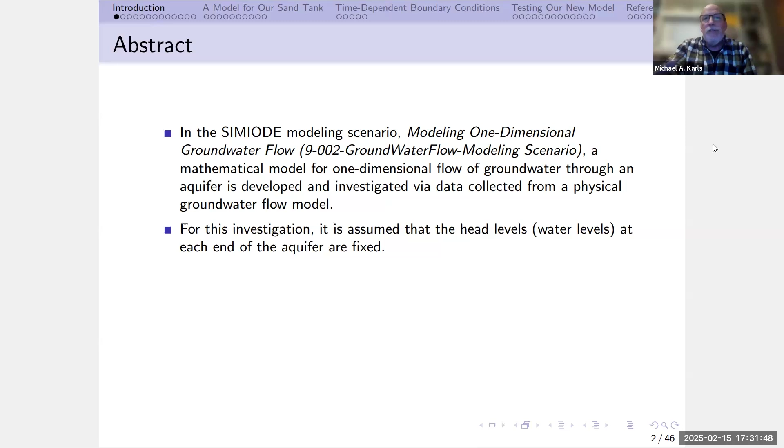In the modeling scenario, modeling one-dimensional groundwater flow, a mathematical model for one-dimensional flow of groundwater through an aquifer is developed and investigated using data collected from a physical groundwater flow model. For this investigation, it's assumed that the head levels, essentially water levels at each end of the aquifer, are fixed. Suppose instead that the head levels at one or both boundaries of the aquifer can change with time, rather than remaining fixed.

So we're going to develop a model for this new situation and use data collected from the physical groundwater flow model to investigate this new model.

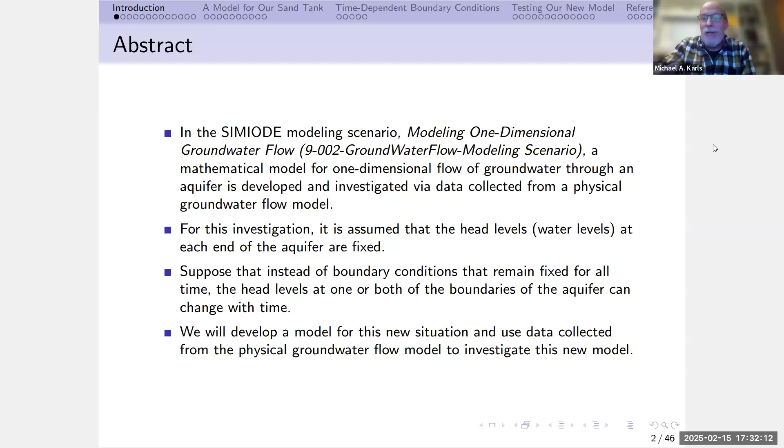Now, this talk is actually kind of complicated, so I thought it'd be good to give an outline of what you're going to be seeing here.

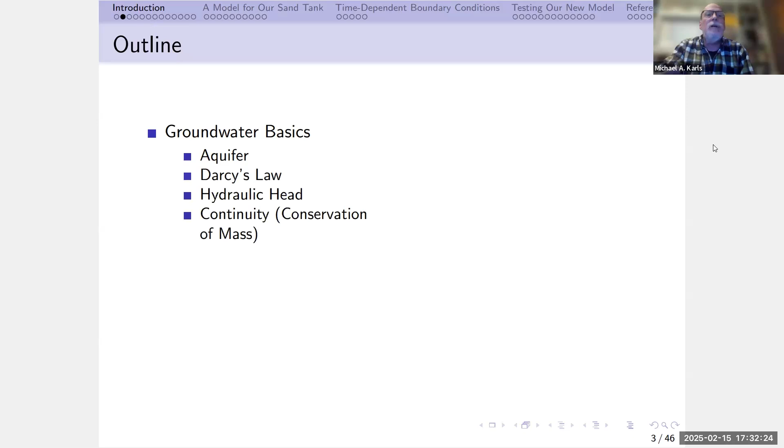First, I'm going to look at some groundwater basics like aquifer, Darcy's law, hydraulic head, the idea of continuity, which is conservation of mass, develop a groundwater flow equation, look at a physical sand tank groundwater flow model, and then talk about how to collect data from that.

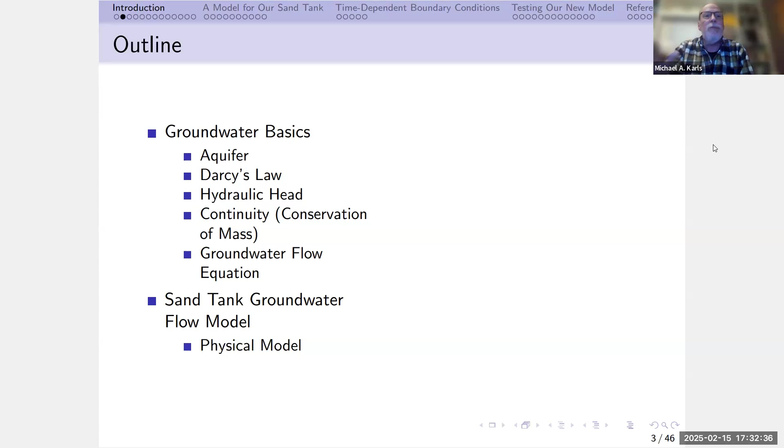And then we're going to look at the SIMIODE groundwater flow modeling scenario that actually appears right now, and we'll develop a fixed head level model and then test our fixed head level model.

And then we're going to look at a revised groundwater flow modeling scenario, and we're going to develop a time-dependent head level model and then test the time-dependent head level model.

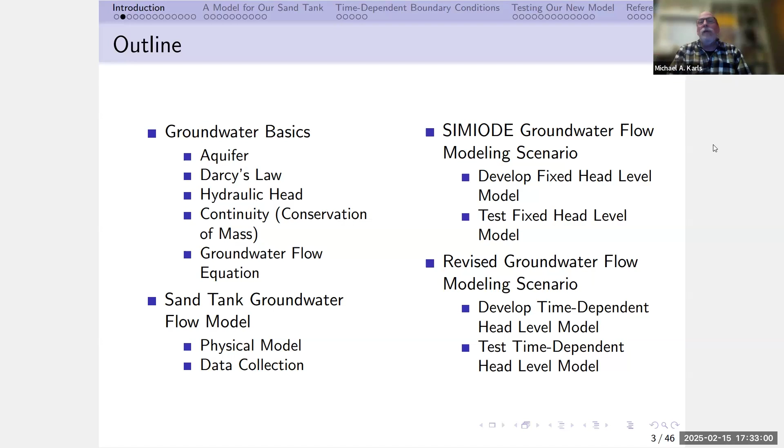Okay, so first of all, this guy is pretty famous when you're looking at modeling groundwater. This is Henry Darcy. In the mid-19th century, the city of Dijon, France, decided to improve and enlarge the city's public waterworks. Henry Darcy, the local inspector general of bridges and roads, was responsible for the civil engineering program.

One of the challenges faced by Darcy was how to design sand filters for the city's public fountains. Sand is an example of a material found in an aquifer, which is a body of saturated rock through which water flows easily. If you click on this link here, there's actually a video about Henry Darcy you can find on YouTube. This is something I show to my class when I teach this stuff.

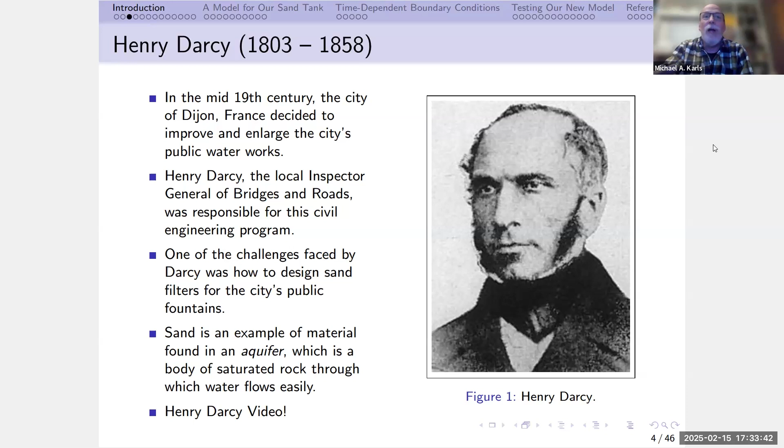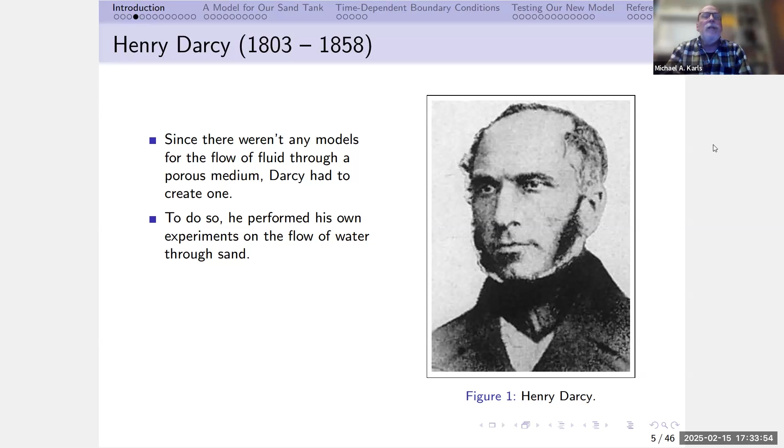Now there weren't any models for the flow of fluid through a porous medium, so Darcy had to create one. To do so, he performed his own experiments on the flow of water through sand. His results, including what we now know as Darcy's law, were published in 1856 as an appendix to a 647-page report on the project, Les Fontaines Publiques de la Ville de Dijon.

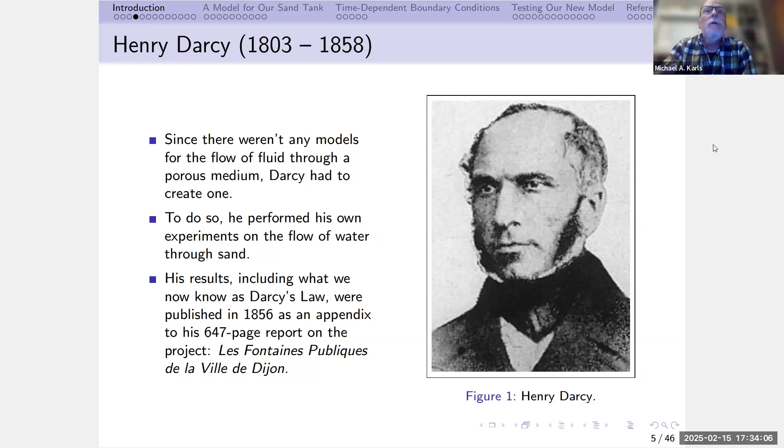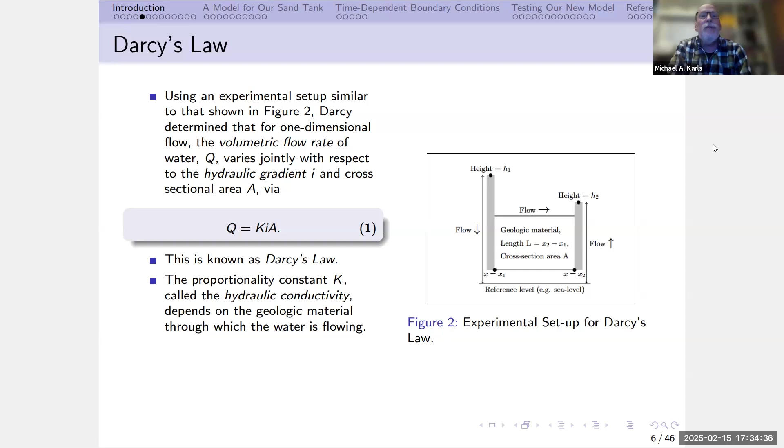This proportionality constant K is called the hydraulic conductivity, which depends on the geologic material through which the water is flowing. The hydraulic gradient measures loss in hydraulic head. Hydraulic head is loosely defined as the height of the water relative to a reference point over a given distance L.

If you look at figure 2, hydraulic gradient is the change in head level over the distance between the two points where we're measuring the water levels. If we label x1 as x and x2 as x plus delta x, and consider head drops over shorter and shorter intervals, meaning we let delta x go to 0, the hydraulic gradient can be written in differential form as negative dh/dx.

The minus sign means you're flowing from high water levels to low water levels. Now, the units of Q are volume per unit time, and the hydraulic gradient is dimensionless, so it follows that the units of hydraulic conductivity K are length over time.

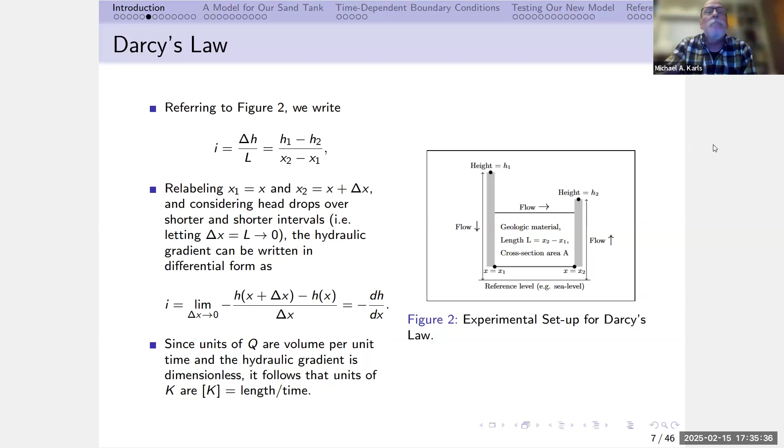Let's consider an aquifer with fixed head levels at each end, such as the one depicted in figure 3. We'll assume the aquifer is made up of homogeneous material and that groundwater flow through the aquifer is one-dimensional, meaning horizontal.

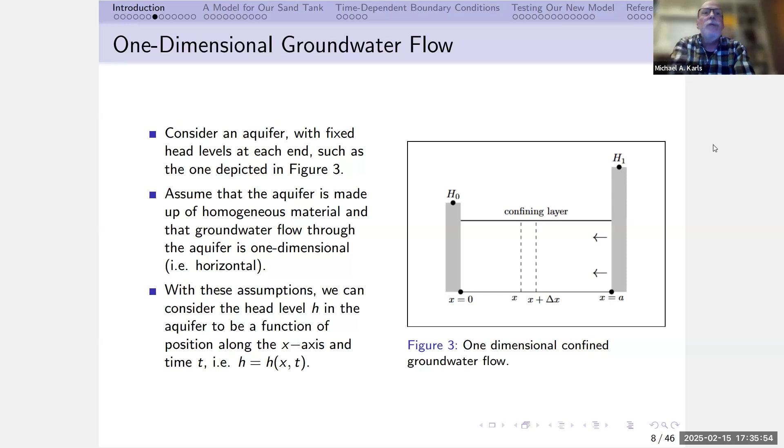With these assumptions, we can consider the head level H in the aquifer to be a function of position along the x-axis and time t. So H is a function of x and t.

This figure 3 shows water flowing from right to left through the aquifer. We're assuming the head level H1 is greater than the head level H naught, along with a small representative element of width delta X and cross-sectional area A.

If we use Darcy's law and the idea of continuity, which is another name for conservation of mass, we can derive a partial differential equation that describes hydraulic head level H of x,t at any point in the aquifer at any time.

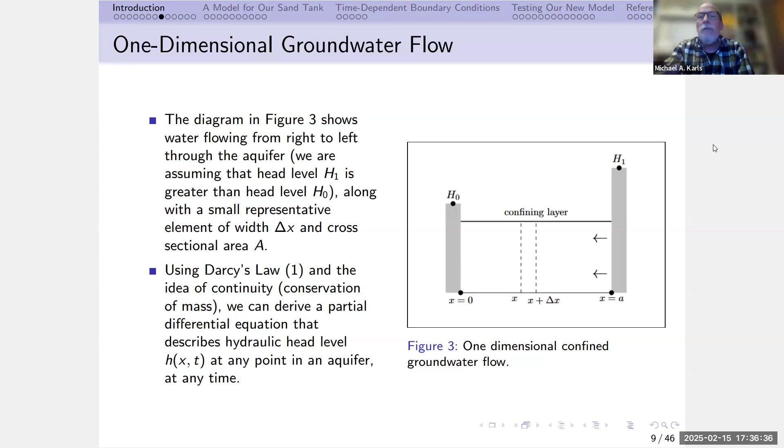There are 4 possible contributions to flow through this representative element: flow across the right face, flow across the left face, flow introduced from an external source, and flow released from or contributing to storage within the medium itself.

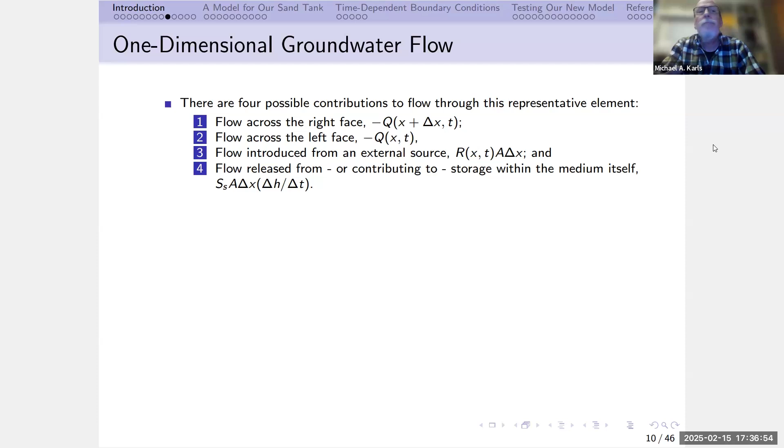As defined above, Q of x,t is the volumetric flow rate, meaning the volume of water per unit time, with units of volume over time. Typically, volumetric flow greater than 0 indicates flow in the positive x direction, so we introduce a negative sign to indicate groundwater flowing in the negative x direction.

This term R of x,t is often called recharge. In groundwater flow scenarios, it can be related to precipitation or leakage into or out of the medium from layers above or below. It describes the volume of water added per unit time per unit volume of the aquifer, with units of volume over time times volume.

This specific storage, S sub S, is the volume of water added to or released from storage per unit volume of aquifer per unit change in hydraulic head. The units of specific storage are volume over volume times length.

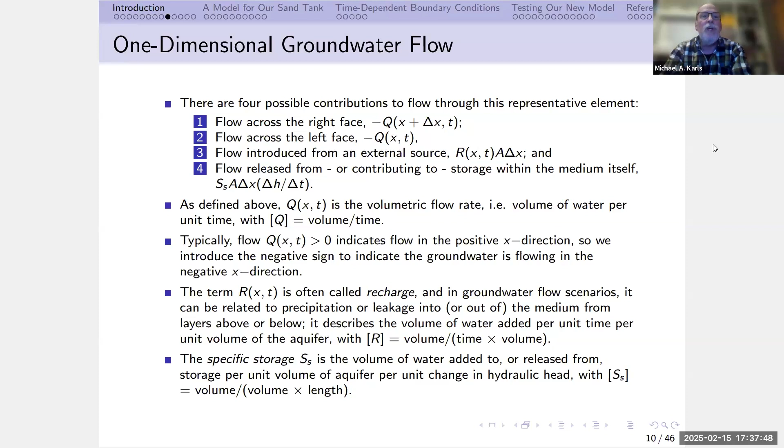If we use the law of conservation of mass, tailored to our scenario, it says that inflow must equal outflow—stuff going in equals stuff coming out. So the flow into the right face plus flow introduced from an external source must equal the flow across the left face plus any change in flow due to storage in the medium itself.

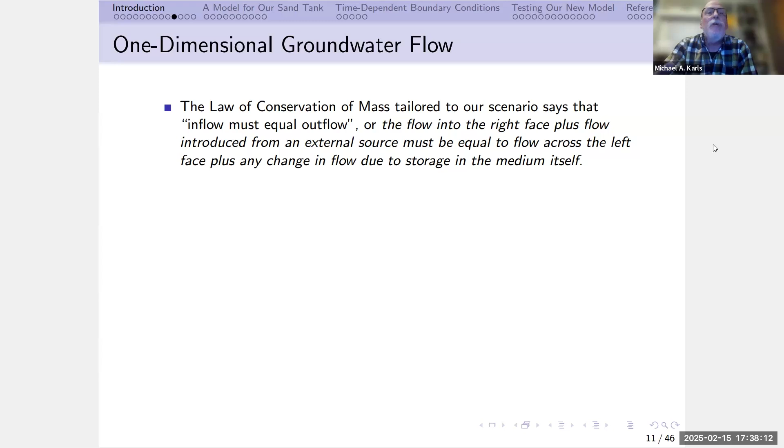Mathematically, we can write this statement as equation 2. If we rearrange to put the Q terms on the left and move the R term over to the right, we get equation 3.

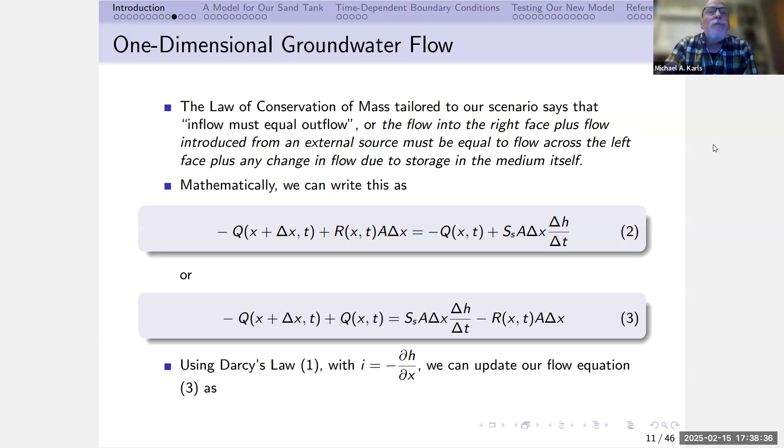If you use Darcy's law with hydraulic gradient being the rate of change of H with respect to X, with a minus sign up front, we can update our flow equation 3 as follows, giving us expression 4. Then if we divide through by K times A times delta X, we get expression 5.

Then if we let delta X and delta T go to 0 in expression 5, we get the one-dimensional groundwater flow equation 6. If you're familiar with it, this looks like the heat equation—this is essentially the heat equation, here equation 6, in the scenario of groundwater flow.

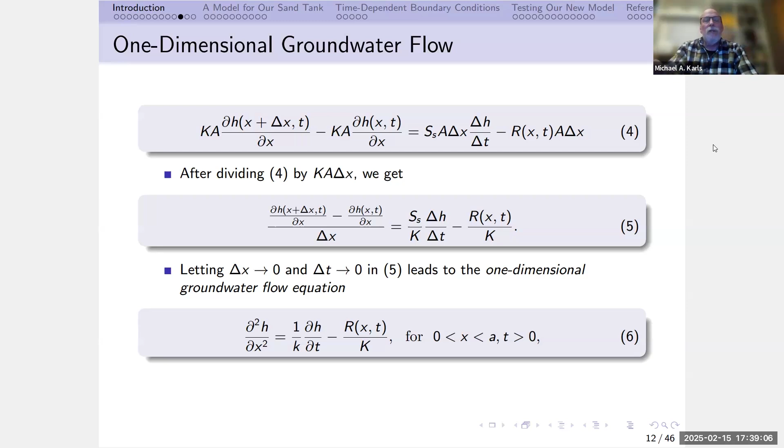Here we've introduced hydraulic diffusivity, defined to be hydraulic conductivity K over specific storage S.

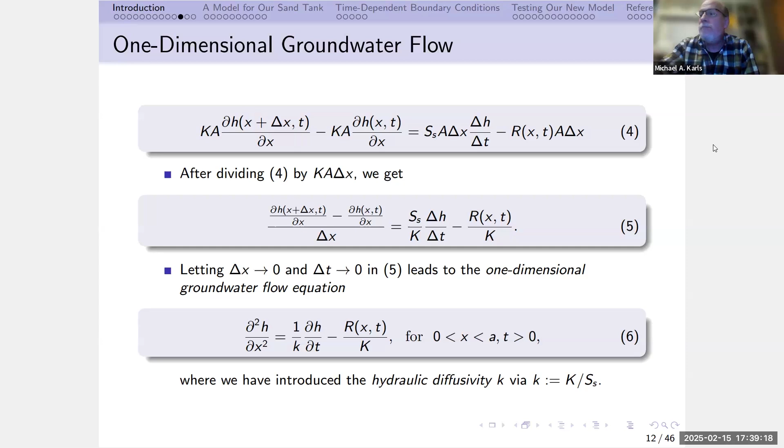One way to illustrate groundwater flow is by means of a physical groundwater flow model. We have a picture of one of these here. A groundwater flow model, or sometimes called a sand tank, such as the one pictured in figure 4, we got this from Ball State University's Department of Geological Sciences.

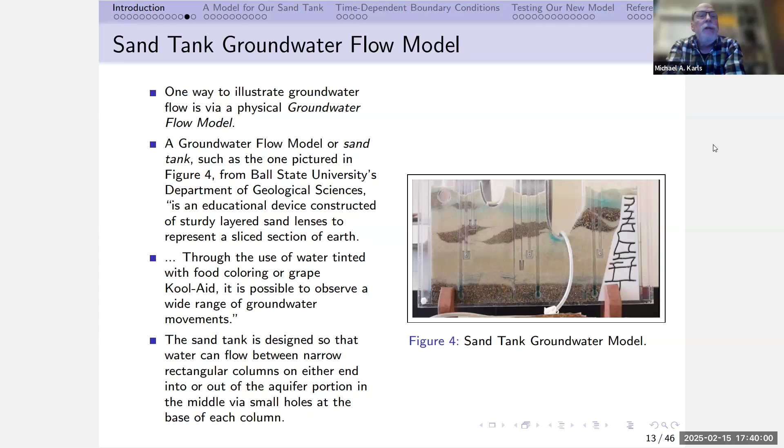These are educational devices constructed of sturdy layered sand lenses to represent a sliced section of earth. Through the use of water tinted with food coloring or grape Kool-Aid, it's possible to observe a wide range of groundwater movements. The sand tank is designed so that water can flow between narrow rectangular columns on either end into or out of the aquifer portion in the middle by means of small holes at the base of each column.

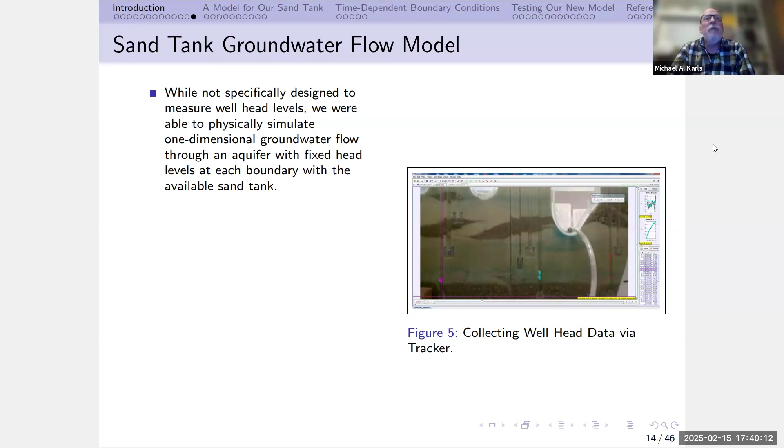Groundwater flow models are not specifically designed to measure wellhead levels, but we were able to physically simulate one-dimensional groundwater flow through an aquifer with fixed head levels at each boundary with the available sand tank.

We did this by pouring green food color water at a fixed rate into the column at the right end of the sand tank and allowing the water to drain out through a flexible tube connected to the drain hole at the left end of the sand tank.

This figure 5 shows a screenshot. We used a physics software called Tracker that you can use to take a video of something moving and then look at individual frames and track the motion of the object.

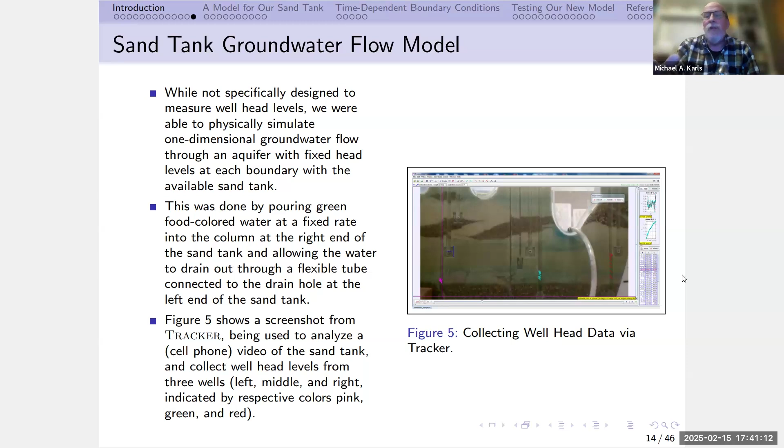We use Tracker to analyze a video we took using a cell phone of the sand tank, and collect wellhead levels from 3 wells. There's the left well, the middle well, and the right well. You should see pink, green, and red colors as we check each frame and look at the height of the water frame by frame.

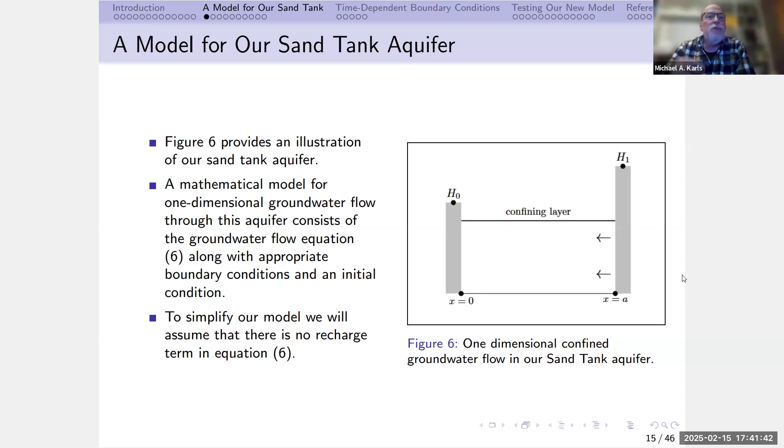So the initial value boundary value problem that describes this specific situation is as follows. Equation 7 is our groundwater flow equation where we took out recharge. Then 8 and 9 describe boundary conditions at each end: we have fixed head levels, H0 on the left and H1 at the right end of the aquifer. And 10 is our initial head level at time 0 for every point along the aquifer between x equals 0 and x equals a.

In order to guarantee a solution to our initial value boundary value problem, we assume that the initial head level, f of x, is sectionally smooth on the interval from 0 to a. By that we mean f has at most a finite number of removable jumps, discontinuities, and corners, with the function's derivatives being continuous between such points.

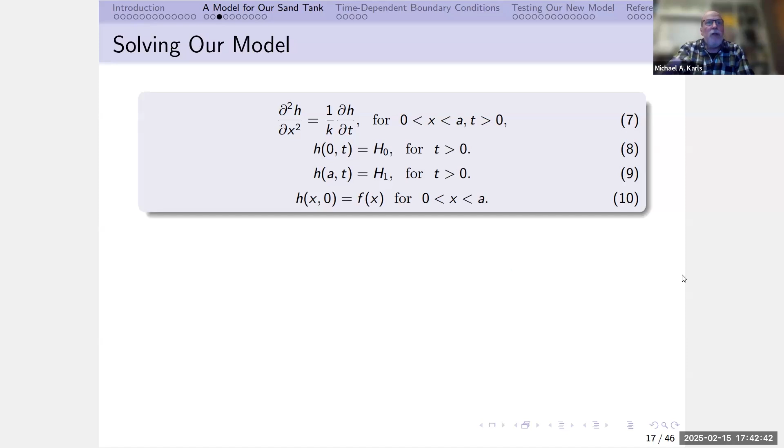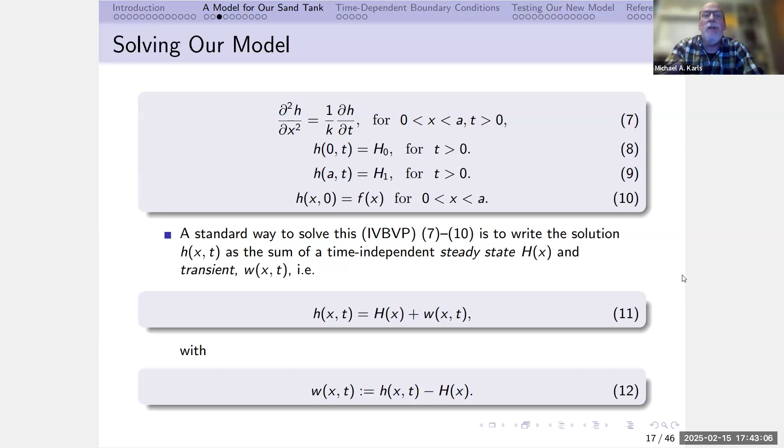Now we look at how we solve our model. A standard way to solve an initial value boundary value problem like 7 through 10 is to write the solution h of x,t as the sum of a time-independent steady state H of x and a transient w of x,t. So h of x,t is written as H of x plus w of x,t, where w of x,t is defined to be h of x,t minus H of x.

It follows that these functions, H of x and w of x,t, satisfy an ODE steady state problem and a PDE transient problem. Here's the steady state problem: the second derivative of h with respect to x is 0, H at 0 is h0, and H at a is h1. If you integrate 13 twice and impose boundary conditions 14 and 15, you find that H of x is h0 plus (h1 minus h0) over a, times x. So it's a linear function.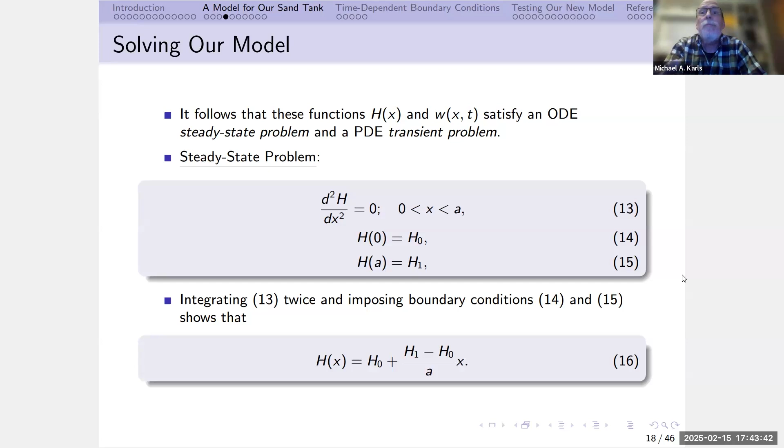If you substitute 16 and 21, our steady state and transient solutions, into 11, we arrive at a model for groundwater flow through an aquifer with fixed head levels at each boundary. It's given by equation 23.

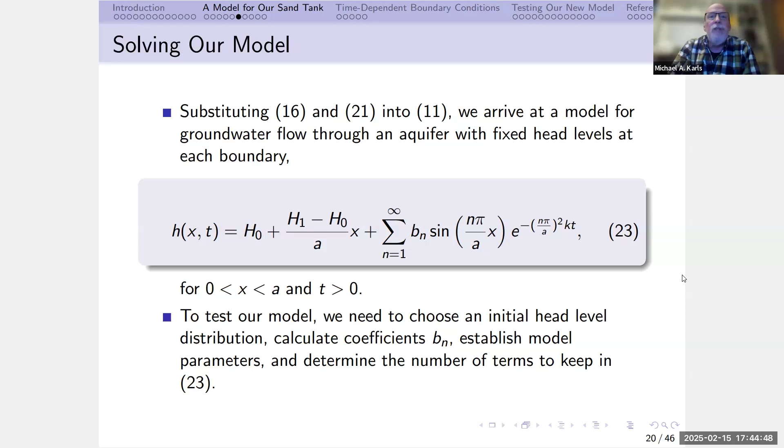Now, if you want to test the model, we need to choose an initial head level distribution, calculate these coefficients b sub n, establish model parameters, and determine the number of terms to keep in our series solution 23.

For initial head level distribution, we're going to choose a linear function: f of x is alpha plus beta times x, where alpha and beta are determined from the initial head levels measured at each of the 3 wells.

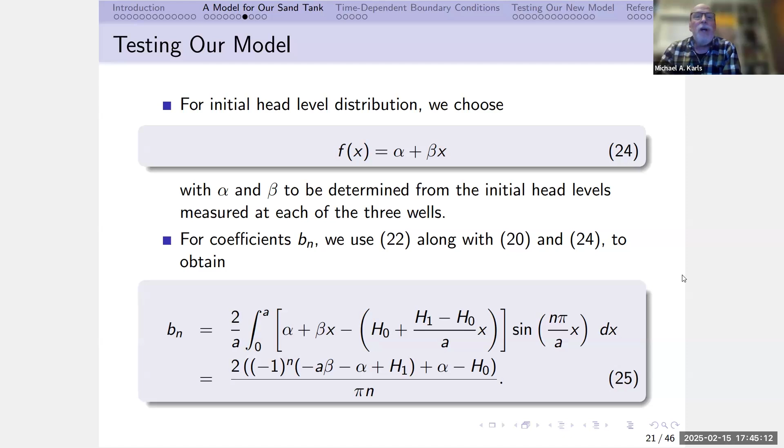For the coefficients b sub n, we use 22 along with 20 and 24. You can calculate this integral, and what you get is 25 - a nice formula for each of the b sub n coefficients in terms of alpha, beta, h0, and h1.

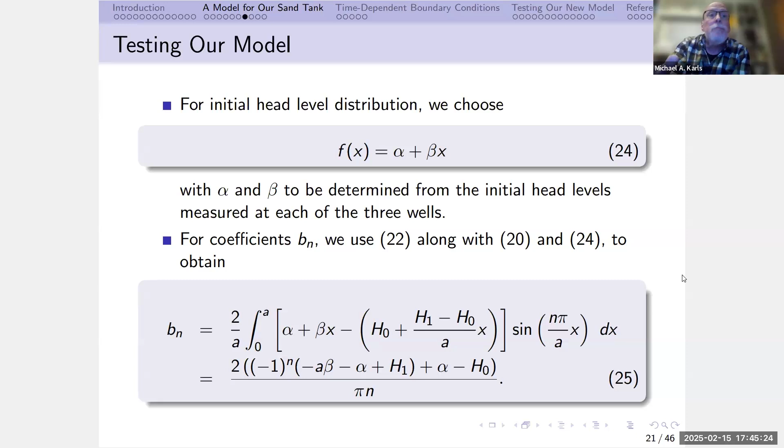Now, for our sand tank aquifer, the length of the aquifer is 23.75 inches, and the boundary head levels at the left are 0.5625 inches, and at the right are 9.6875 inches.

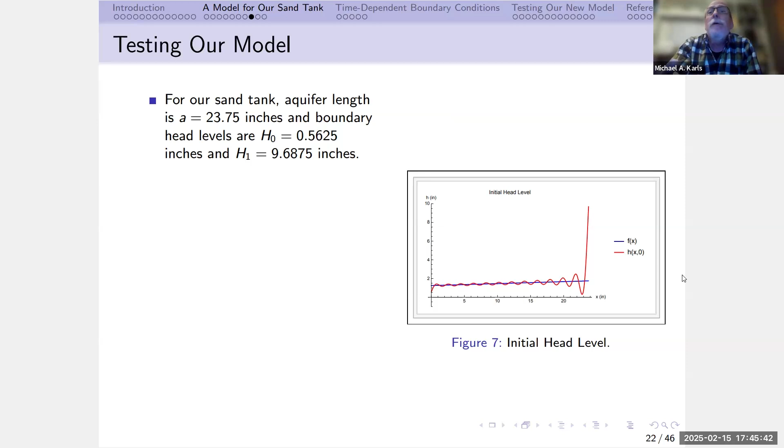If you use Mathematica's fit command, which performs a least squares fit, we find that for our initial head level distribution, alpha is 1.2454 and beta is 0.021101.

So then we did a graphical and mean square error comparison between our initial head level distribution f of x and our model h of x,t at time t equals 0. What we find is that a partial sum of 25 terms in 23 should be sufficient. There's a picture of our model, which is the red curve, and our initial head level, which is the blue line.

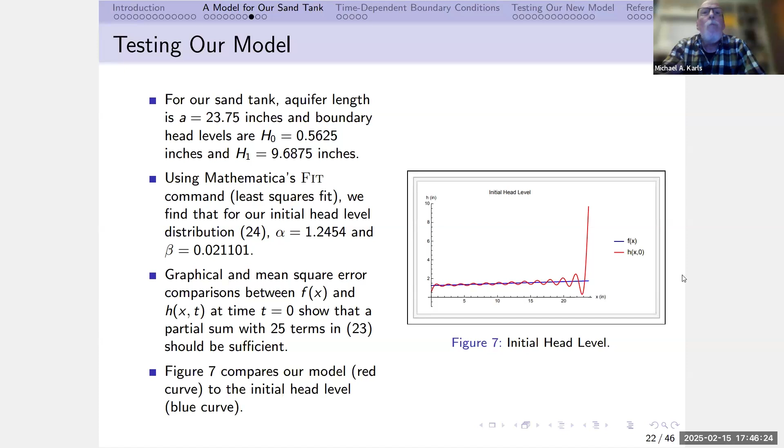We don't know what type of materials are in the aquifer, but we suspect it's comprised mainly of some type of sand. So we're going to choose a value for the hydraulic diffusivity K to try to produce a good graphical fit. You can pick values of K to get the curves to line up with the data points.

After that, we use the Mathematica FindMinimum command to minimize the sum of square errors. We ended up getting K equal to 8.8526 inches squared per second, with a root mean square error of about 0.7840 inches. If you look at the model, the curves represent the model and the dots are the data we collected. It should be clear from figure 8 that there's poor agreement between the model and the measured data.

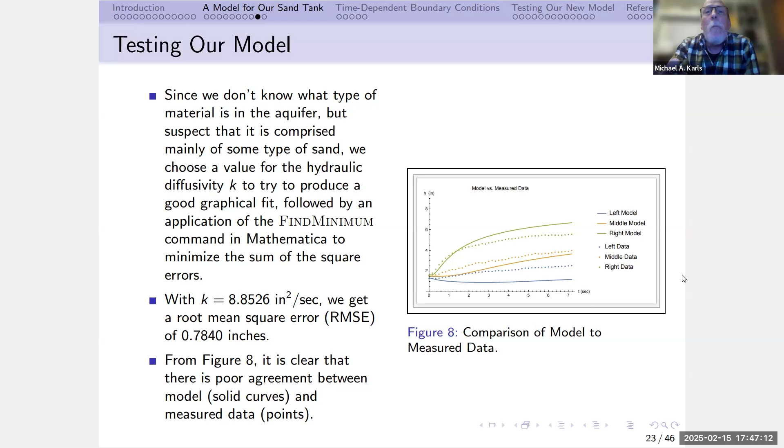So in order to revise our model, we considered several scenarios—six different scenarios in total. One of them is to treat hydraulic diffusivity K, as well as the boundary head levels H0 and H1, as parameters. Again, we started with choices of parameters to get a good graphical fit, followed by an application of the Mathematica FindMinimum command to minimize square errors.

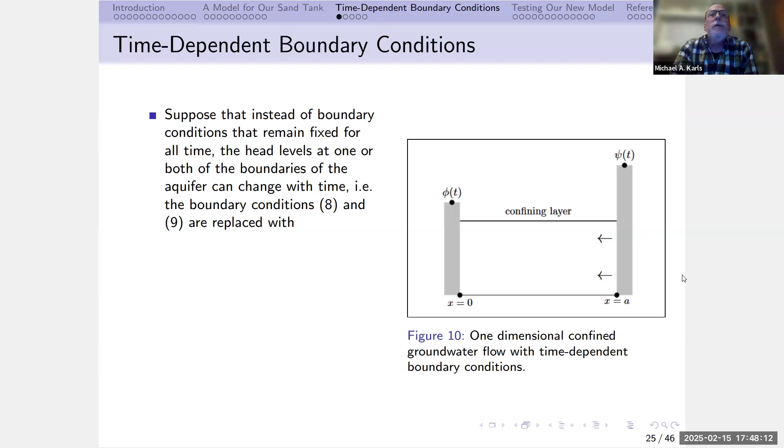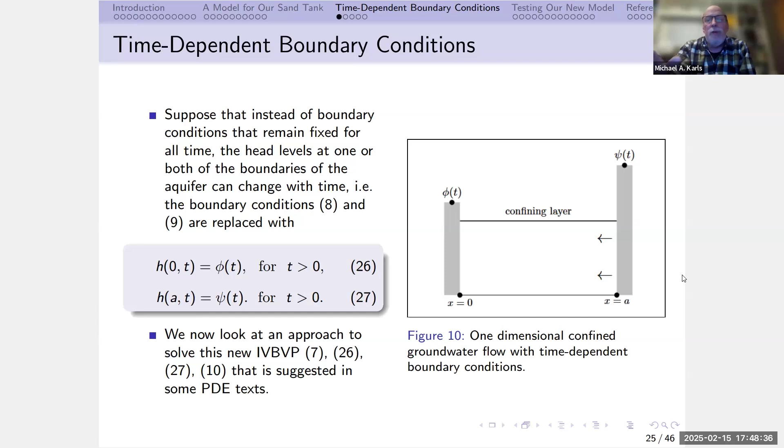So we're now going to look at an approach to solve this new initial value boundary value problem. We have the same equation 7, the same initial head level function, and new boundary conditions 26 and 27, which are time dependent.

Using the idea of splitting the solution h(x,t) into a steady state and a transient part, as we did before, as a guide, let's write the solution of 7, with boundary conditions 26, 27, and initial condition 10, as the sum of what I'll call a 'steady state' solution v(x,t), and a 'transient' solution w(x,t).

So v is going to be phi plus (psi minus phi) over a, times x, where phi is the boundary condition at the left boundary and psi(t) is the boundary condition at the right boundary. We define the transient solution w(x,t) to be h(x,t) minus v(x,t). Then, with h(x,t) defined as v(x,t) plus w(x,t), one can show that w(x,t) solves the following initial value boundary value problem.

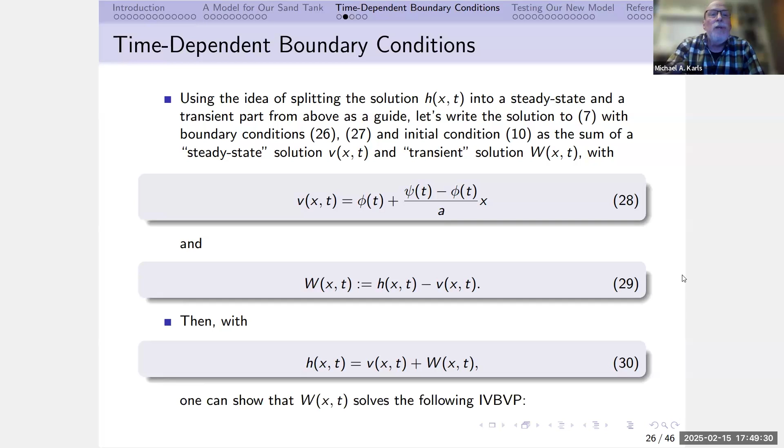Here S(x,t) is 1 over k times, basically, phi prime plus psi prime minus phi prime over a, times x.

Now if you compare this new transient problem to the transient problem we saw before, we see that essentially the only difference is there's a non-homogeneous term S(x,t) in equation 31.

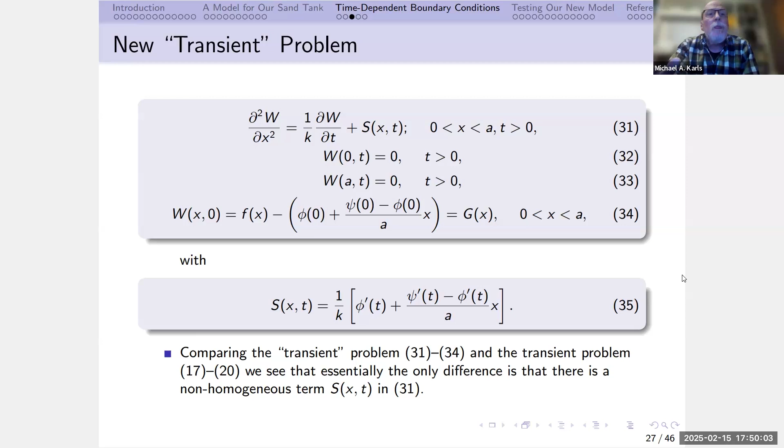So if you go back and think about the idea of variation of parameters, used to solve a non-homogeneous linear ordinary differential equation by writing the solution as a linear combination of solutions of the corresponding homogeneous equation with coefficients being unknown functions to be determined, you can use the same idea for partial differential equations as well.

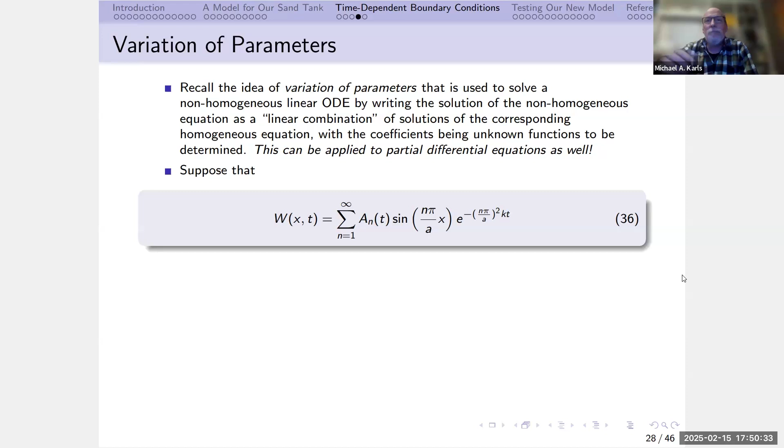So let's suppose that our 'transient' solution w(x,t) is of the form of this sum here, and we'll write S(x,t) as this sum here—it's just a Fourier series for S(x,t). So S_n(t) are the Fourier coefficients for the S(x,t) function.

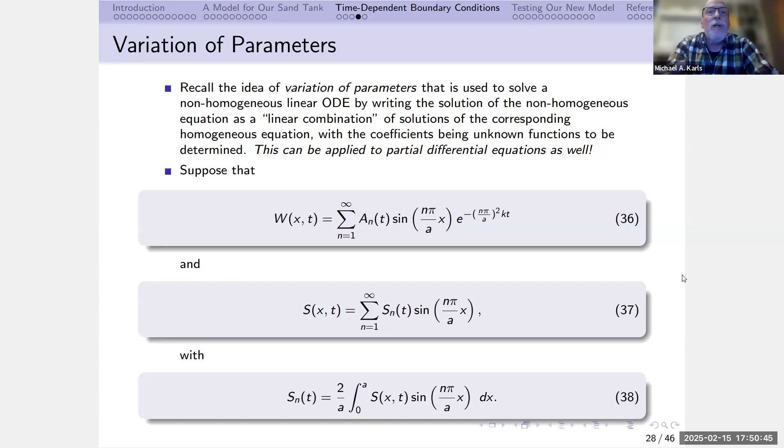So if you use the suggested form of solution 36 with Fourier series for S of xt, it turns out that these coefficients a sub n of t are given by this integral here, where a sub n at 0 is 2 over a times the integral of capital G of x times sine of n pi over a x.

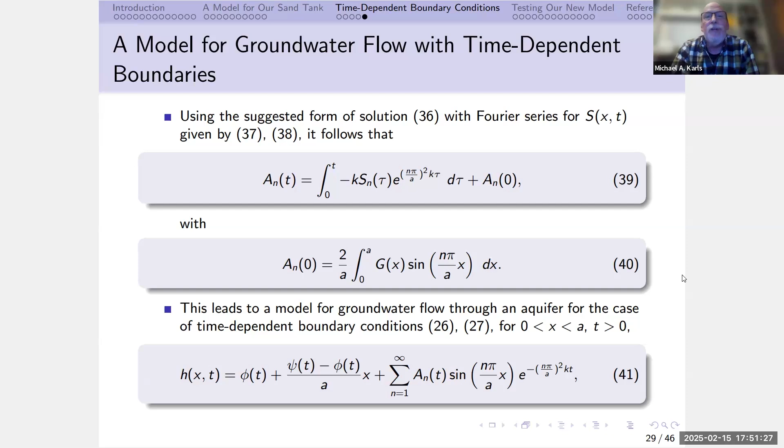And so we're led to a model for groundwater flow through an aquifer for the case of time-dependent boundary conditions, and it looks like this. It looks somewhat like what we had before, except instead of having H0 and H1, we start out with these time-dependent boundary conditions here. These A sub n coefficients are functions of time, and they're given by equations 39 and 40. That's how you calculate them.

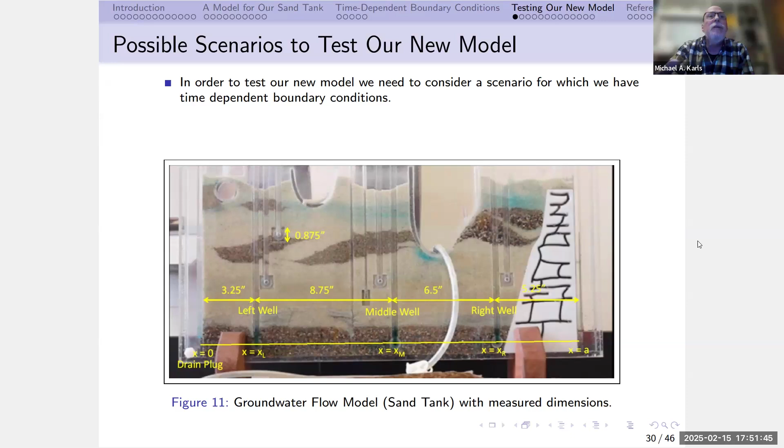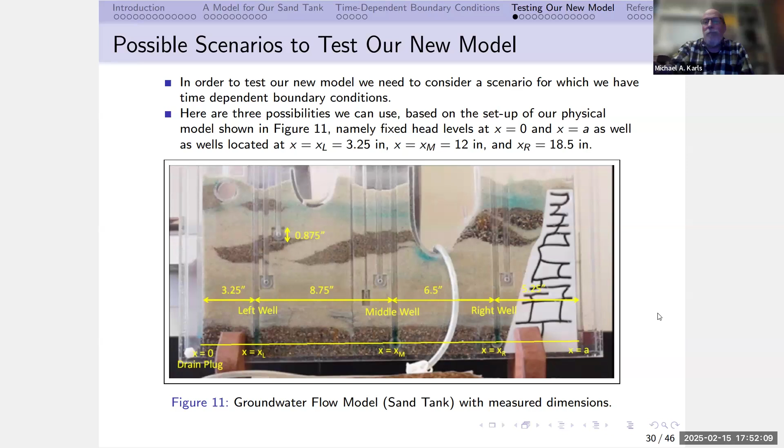Okay, so now I want to test our new model, and so we need to consider a scenario for which we have time-dependent boundary conditions. Here's three possibilities that we can use based on the setup of our physical model shown in Figure 11. So in Figure 11 here, here's x equals 0, and then over here x equals a, that's where we had the fixed head levels. But so now we have our left well, our middle well, and our right well. So what we're going to do is devise some ways to set up time-dependent boundary conditions at one or both boundaries. Here's some possible scenarios to test our new model.

So the first one is on the x interval: we start with the left well and go over to the right end of the aquifer. Let x sub l correspond to the left boundary and x equals a correspond to the right boundary. Then phi of t is going to be a function fit to the measured wellhead levels collected at x sub l, and psi of t will be set to the fixed head level at x equals a. For this scenario, we set up the model on the revised x interval 0 to a hat, where a hat is a minus x sub l, and the revised well locations x sub m hat and x sub r hat, where you take x sub m and x sub r and subtract off x sub l.

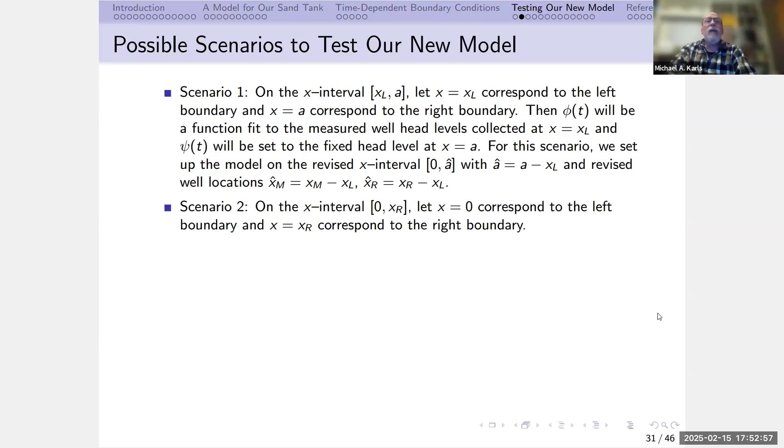For the second scenario, on the x interval 0 to x sub r, the right well, let x equals 0 correspond to the left boundary and x equals x sub r correspond to the right boundary. Then phi of t will be set to the fixed head level at x equals 0, and psi of t will be a function fit to the measured wellhead levels collected at x equals x sub r. For this scenario, we're going to set up the model on the revised x interval 0 to a hat, with a hat is x sub r, and the well locations will be x sub l and x sub m.

And for our third scenario, on the x interval from the left well to the right, x sub l to x sub r, let x equals x sub l correspond to the left boundary, and x equals x sub r correspond to the right boundary. Then phi of t will be a function fit to the measured wellhead data at x sub l, and psi of t will be a function fit to the measured wellhead data at x equals x sub r. For this scenario, we're going to set up the model on the revised x interval of 0 to a hat, with a hat is x sub r minus x sub l, and the well location for this will be x sub m hat is x sub m minus x sub l.

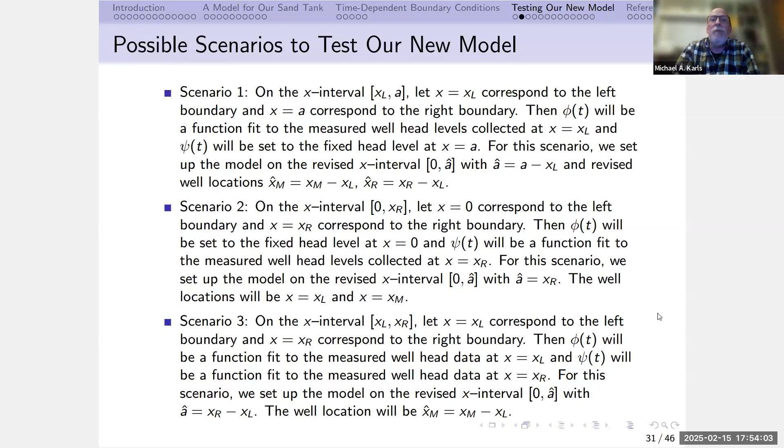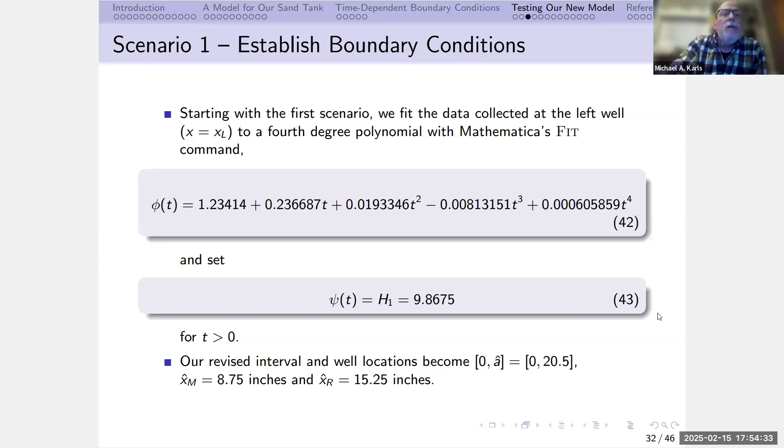Okay, so I'm going to start with the first scenario. I'm going to fit the data collected at the left well to a fourth degree polynomial using Mathematica's fit command. So here's the fourth degree polynomial, and we'll set the, that's phi, and psi of t is going to be the fixed head level at x equals a. Our revised interval and well locations will become 0 to a hat, going from 0 to 20.5, and x sub m and x sub r hat are 8.75 inches and 15.25 inches.

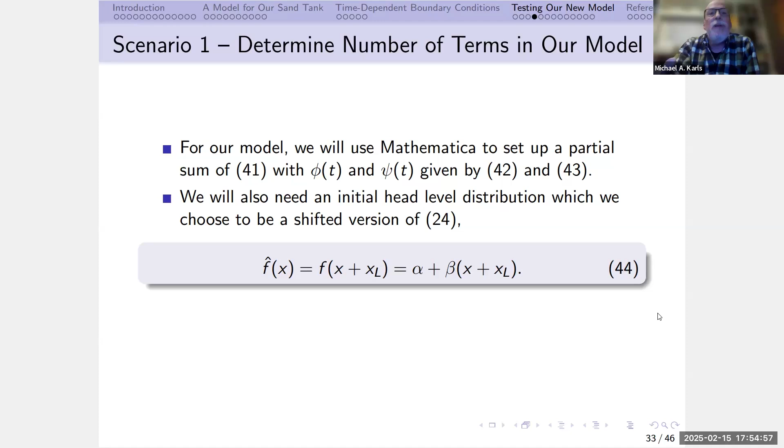And so for our model, we're going to use Mathematica to set up a partial sum for our series solution 41 with phi and psi given by the equations on the last slide. We'll need an initial head level distribution, which we choose to be a shifted version of f of x, which is f hat of x is f of x plus x sub l. The coefficients a sub n of t are computed by means of equations 38 to 40, and k is a parameter that can be varied.

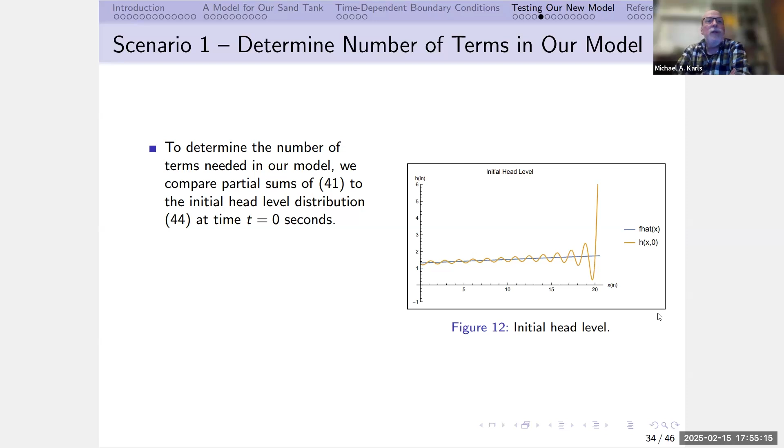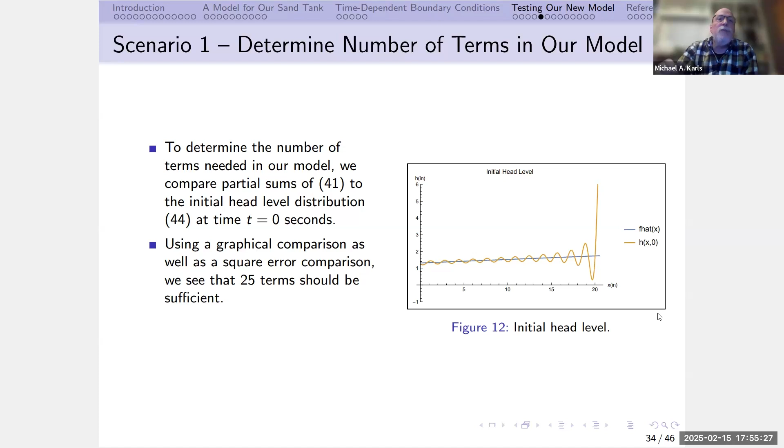Okay, so to determine the number of terms needed in our model, we're going to compare partial sums of our series solution 41 to the initial head level distribution for our shifted function f at time equals 0 seconds. We use the graphical comparison as well as the square error comparison. We see again that 25 terms should be sufficient. And figure 12 compares our model to the initial head level.

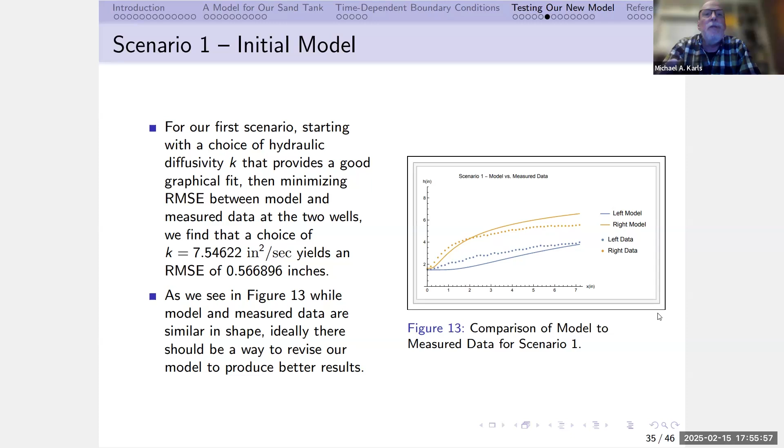Our first scenario starts with a choice of hydraulic diffusivity K that provides a good graphical fit, then minimizing root mean square error between model and measured data at the two wells. We find that with K equals 7.54622 inches squared per second, we get a root mean square error of about 0.56 inches. As we see in figure 13, while model and measured data are similar in shape, ideally there should be a way to revise our model to produce better results.

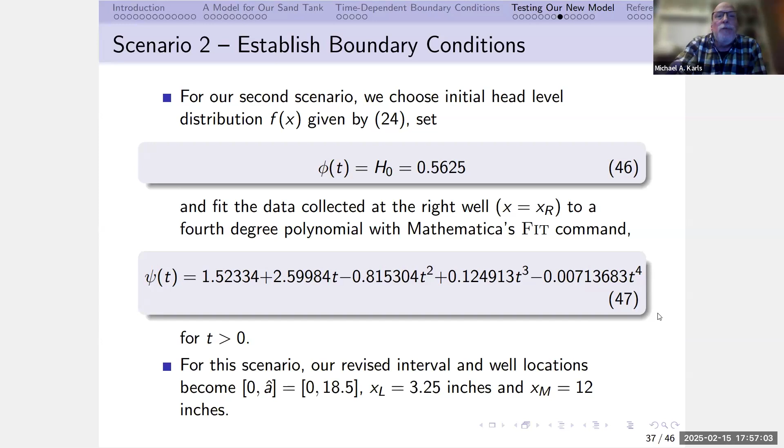For our second scenario, we choose initial head level distribution f of x given by equation 24 and set phi of t to be H naught, which is 0.5625 — that's the fixed head level at x at the left end of the aquifer — and fit the data collected at the right well to a fourth degree polynomial with Mathematica's fit command, that's our psi function. For this scenario, revised interval and well locations become: the aquifer length goes from 0 to 18.5 inches, x sub L is 3.25 inches, and x sub M is 12 inches.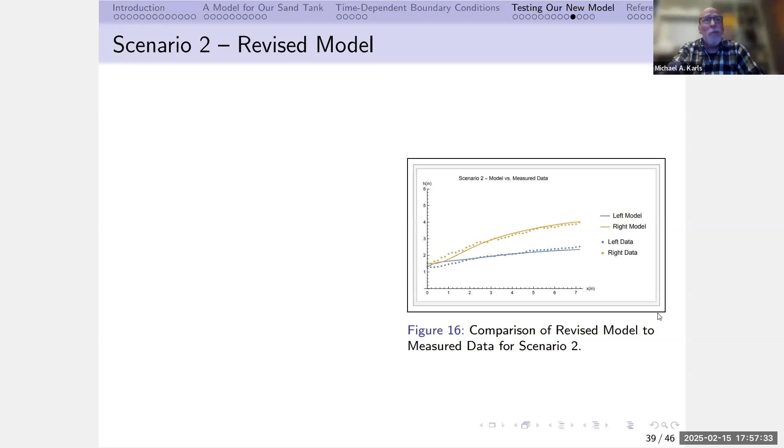So again, we revise our model and let H naught be a parameter for the left well. Figure 16 shows we get a much better result, with a root mean square error of about 0.12 inches when K is 18.2 inches squared per second. H naught is about 1.8 inches.

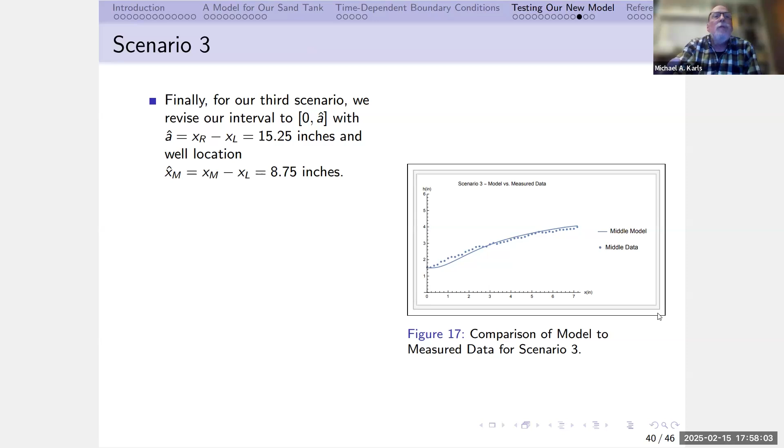Finally, for a third scenario, we revise our interval. So A hat is x sub r minus x sub L, and x hat sub m is x sub m minus x sub L. For boundary conditions, we choose A, B, and psi to be the functions we fit to the data at the left and right wells. We'll use the shifted function for initial head level. For this model, we again pick 25 terms, and we have one parameter, hydraulic diffusivity K. We find root mean square error is minimized to about 0.15 inches with K equals 18.59 inches squared per second, and we get nice results in figure 17.

In conclusion, using a sand tank groundwater model for an aquifer and collecting head level data by means of a cell phone camera and tracker, we've been able to show that the one-dimensional groundwater flow equation can be used to model the head levels in the aquifer for the case when there are time-dependent head levels at one or both boundaries. The results obtained are surprisingly good, especially considering that the aquifer we worked with does not have uniform material throughout.

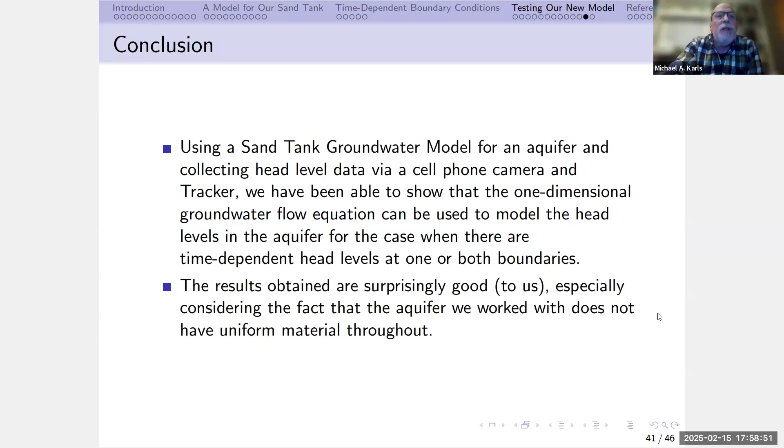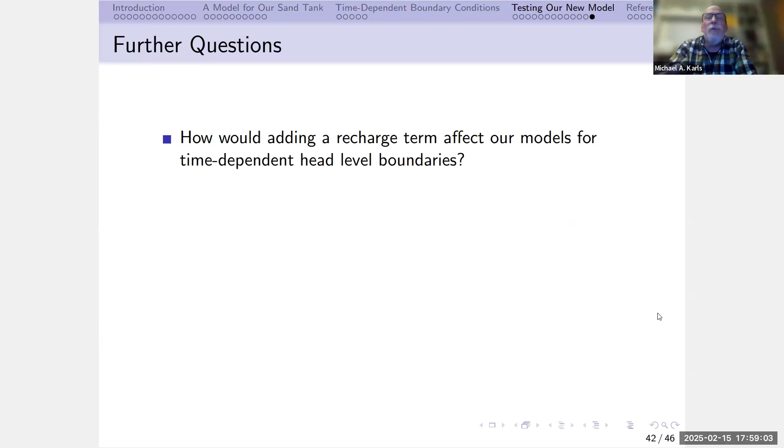Here are some further questions we might consider: how would adding a recharge term affect our models for the time-dependent head level boundaries? For the fixed head level boundaries, we tried this and get essentially the same results as we saw. Is there a way to construct coefficients of the form in equation 25 that would allow more efficient computation instead of computing definite integrals for each t value? Since we're integrating, it's very computationally intensive to do these calculations. Our model also assumes the aquifer material is homogeneous throughout, so a natural question for future investigations is whether we can modify our model to take into consideration different materials in the aquifer at different levels.

The next four slides are just a bunch of references.